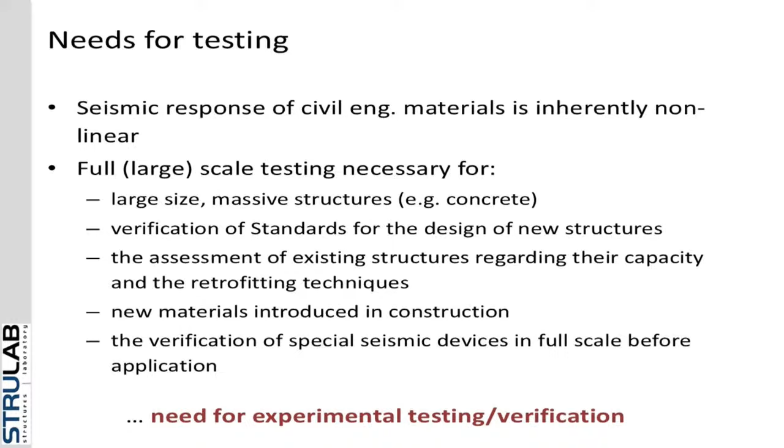So what do we need to test? We all know that the seismic response of civil engineering structures is highly and inherently nonlinear. So full-scale testing is necessary, because we have to deal with large, massive structures. We need to verify standards for the design of new structures, assess existing structures, and study how to increase capacity through retrofitting techniques. We introduce new materials in construction and have to test them before being applied in practice. And we need to verify seismic devices in full scale before application. So the need for experimental testing exists, and it's very intense.

And what tools do we have at hand? In experimental methods, we can go from slow static testing to dynamic testing, depending on the rate at which we test the structure. In between lies the hybrid simulation. If we count the response realism of each method, cyclic testing at low cost can have little realism with an actual seismic event, the response of a structure in a seismic event. On the other hand, shaking table testing is the real thing, but even done at scale, this comes at high cost.

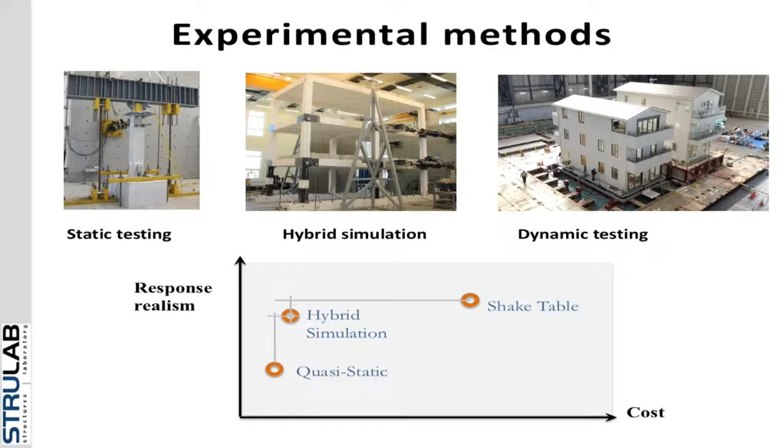The hybrid simulation strives to lie between these, trying to have a good enough prediction of the response of the structure, but at a reasonable cost. And of course, hybrid means that we merge two things. What do we strive to merge? We strive to merge our numerical capabilities for things we know, to experimental testing for the parts of the structure that we don't know really well.

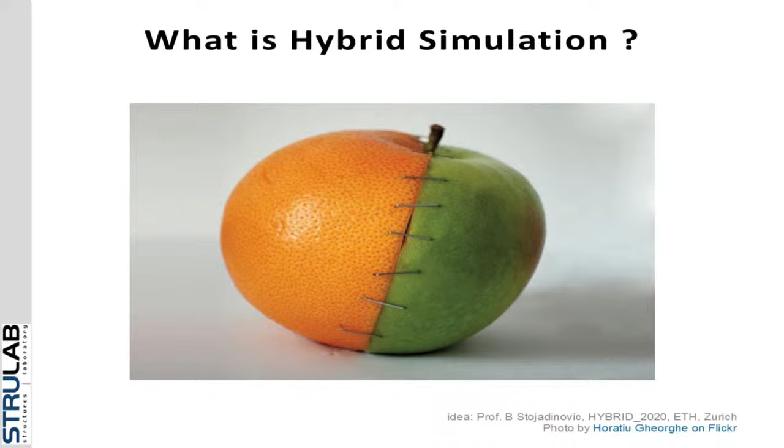So the main idea is that we split the inertia and damping forces, which are accommodated by a numerical model for the part of the structure, or the whole structure, that we really know the response and can describe pretty accurately. Then regarding the seismic resistance of specific parts of the structure, we rely on physical modeling. We can construct a specimen in the lab as in the picture, run a code and solve the equations of motion, get the displacement for each step of the accelerogram, feed that displacement to the actuators on the structure, measure the force that the actuators need to apply these displacements, and then feed back this force, which is actually the product of the stiffness times the displacement.

But it's the real thing. We don't make any assumption on that. And this becomes the initial point for starting the solution for the next time step. So it's a step-by-step procedure.

Just a brief historical note: initially this technique was termed online computer-controlled test or pseudo-dynamic test. The word pseudo is not very accurate, it might be misleading sometimes—it's not the real thing. Everything happened at the University of Tokyo initially in 1969, so it's already quite some decades ago.

And they ran several tests until 1975. Actually, in 1975, they conducted the first substructural test. I will go through this in a while.

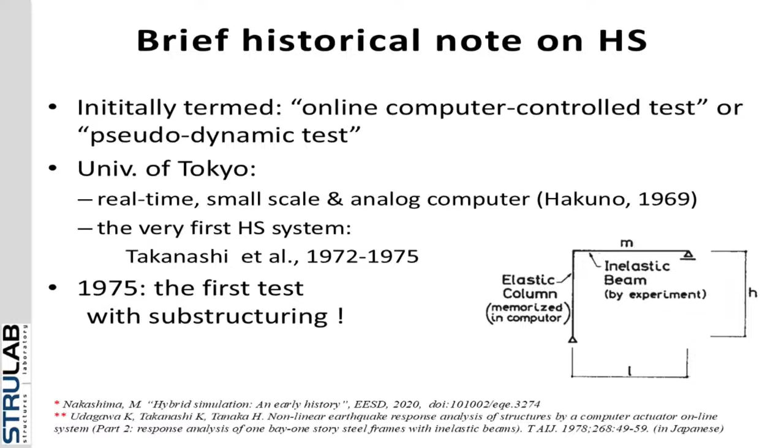Then the hybrid simulation, also the pseudo-dynamic technique, its evolution can be distinguished in decades. So between the 70s and 80s, there were many tests at the University of Tokyo, both on concrete frames and steel structures. Then the US-Japan Joint Research Project gave a large impetus to this technique, so it started being applied also in the United States at several facilities.

Like the one at San Diego, between the 80s and the 90s. And from the 1990s until today, the method initially saw a great development thanks to the NSF project, which was a 10-year project of $80 million that really paved the way and created many tools that we use even today. And it was then that the term hybrid simulation was coined for this technique.

Just to note that since 2000 till today, there are more than 200 papers, and maybe I haven't counted them pretty well, on employing this technique. To implement this technique, we need certain ingredients.

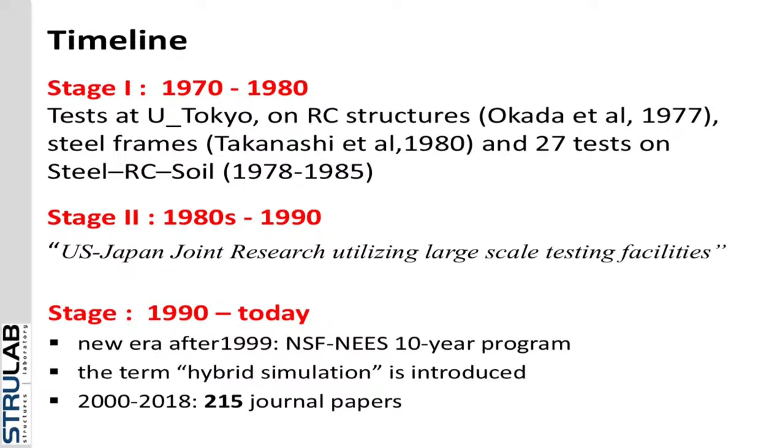We need hardware, but not something special, normal hardware with some characteristics. We also need special software, though, because we are coupling two entities, the numerical part and the experimental part. And there are several platforms available, open source platforms available for this scope.

Normal control schemes can be applied for the dynamic testing technique, but also newer ones can be employed in certain cases, like mixed control, force and displacement, or switched control—switching during the test from force to displacement if you go over the peak of the force. You need communication among the components, because your controller in the lab has to communicate with some numerical solver.

And for all this, of course, we need quality and reliability. And the reliability depends on the errors that appear, both on the numerical part and the experimental part. I won't go through the details—it's not the place, it's not the time to do so. But I want to stress that there are experimental errors, and the problem is that if we don't take care of these errors, they accumulate because this technique is stepwise.

So we run through 2,000 points of an accelerogram, and if you have even a tiny error in the force or the displacement which you apply to the structure, this accumulates, because the new values that we measure bear this error too, the influence of this error too, and it accumulates through the test.

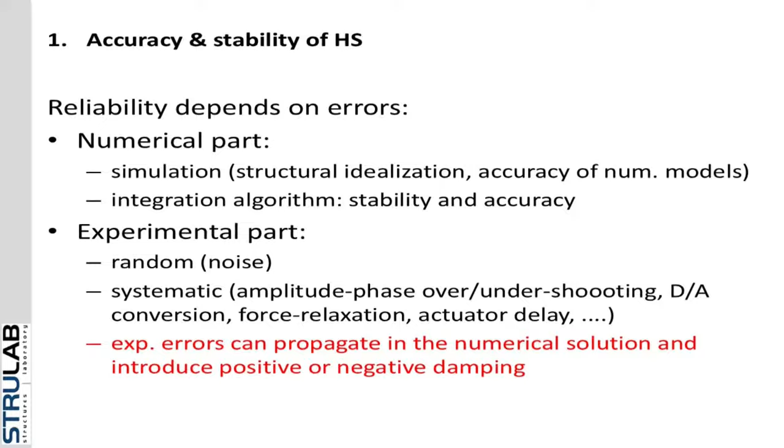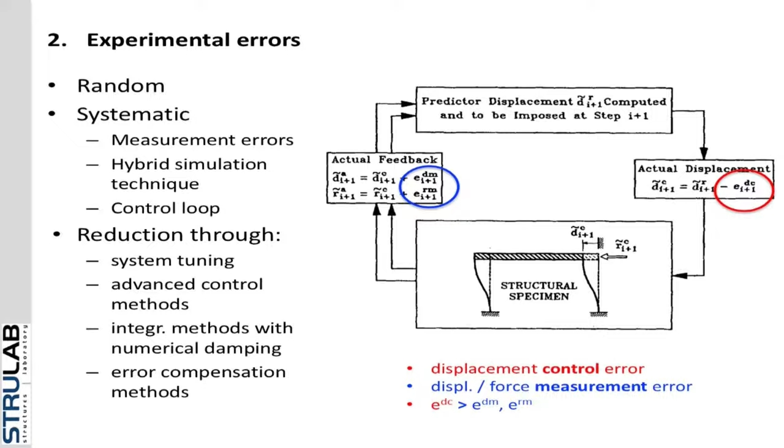So I will skip this. There are several error tracking indicators. They have been developed both for the local response and the global response. And principally, what we might want to look at during the test online, a good indicator is the energy indicator, input and consumed energy during the test. This is a good indication of whether the control is good and the test goes well, because there is no other way to understand if the structure deviates due to experimental errors during the response.

And the hybrid simulation technique comes in several forms, so there is a lot of flexibility depending on the problem we want to study, and this is very important. You can run a normal pseudodynamic test very slowly, taking 3 or 4 hours, but you can also run a real-time hybrid simulation test, which runs in approximately the same time scale as an actual earthquake, like a shaking table test. But we don't have a shaking table—the structure is fixed at the floor of the laboratory.

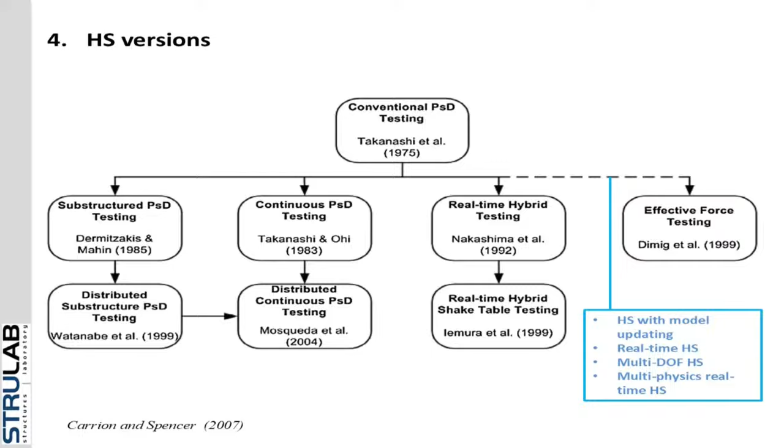So this is all I want to say about the method at this point, and I would like now more to stress the applications. So we will go through some full-scale tests that have been run with the hybrid simulation technique—some hybrid simulation tests, including with substructuring, continuous hybrid simulation with substructuring, tests on non-structural components, soil-structure interaction, and distributed hybrid simulation.

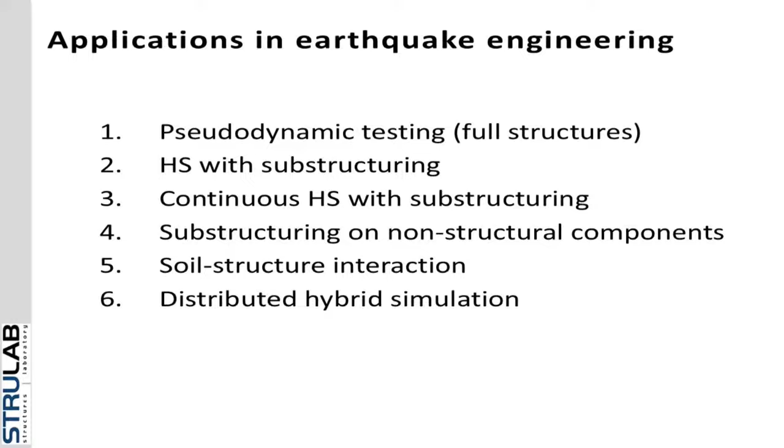So one of the first tests we conducted in our laboratory was a two-story structure, and this structure contained all the structural deficiencies of existing structures: small dimensions, lack of stirrups, deficient lap splicing. Moreover, one side of the structure had a higher stiffness, double the stiffness, than the other side. The columns on one side were 25 centimeters, on the other side they were half a meter.

This was provoking, obviously, a torsional response of the structure. How does such a deficient structure respond to this structural characteristic? So this was important to run. And this test was in full scale. There's no substructuring. A numerical model was producing the displacements and the rotations that we needed to apply at each floor, and with 2 actuators per floor, we could apply displacement and rotation as prescribed by the numerical simulation.

And this technique was applied in 2 configurations of the structure, one a regular one and one with an open story. So the upper story, you see in the picture here, the upper story is infilled.

Of course, we don't do the test just to identify the deficiencies, we have to correct them. And then we can employ several techniques. In this structure, we employed a series of different techniques. In the first case, we attempted to reinstate the stiffness balance, so we jacketed the columns on one side, giving the same stiffness on the two sides to take off the influence of the torsional response.

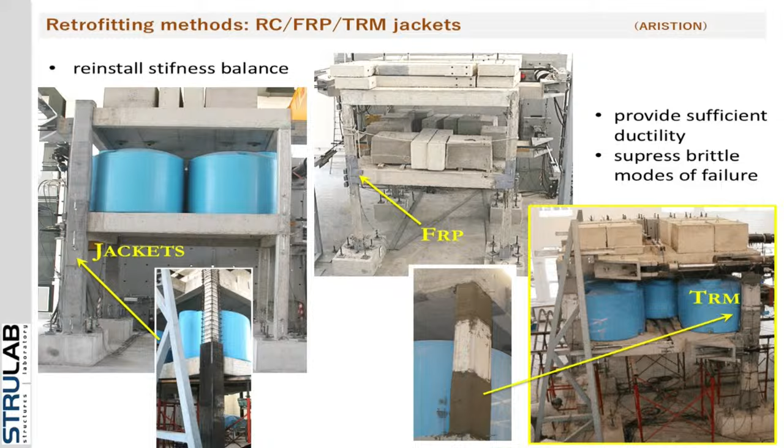Another test that we performed in full scale regards a steel structure, and this is actually a collaboration with a team led by Professor Di Sarno in Project ERIES. In this case, again, there is a difference in the stiffness at the base of the columns on one side with respect to the columns on the other side, and this provokes, obviously, the torsional response.

But on top of that, we needed to apply 2 seismic motions in 2 transverse directions, and this has been done in the lab.

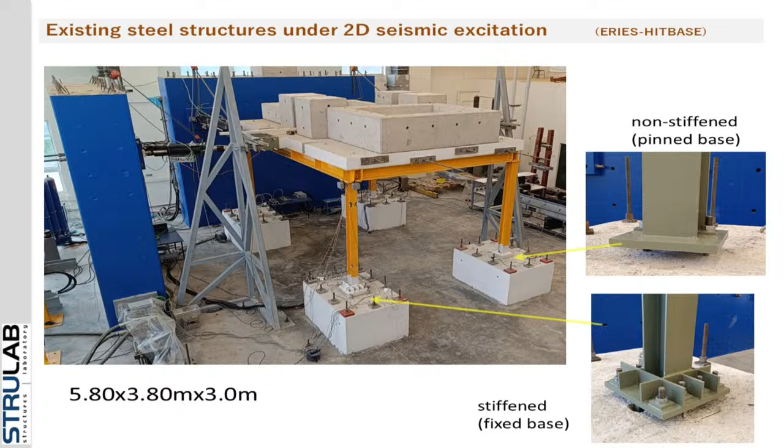Another thing that we wanted to observe was the effect of having successive seismic motions on such a structure, so if we have a repetition of seismic input one after the other.

This also requires some adjustments in the testing strategy, because the numerical solution provides you the displacements at the center of stiffness of the structure in the global coordinate system, but when you command the actuator to apply a displacement or measure a force, this is done along the axis of the actuator, which does not coincide with the center of the global reference system. So we need geometric transformations between the commands sent to the actuators, and from the measurements we take from the actuators to feed back to the numerical simulation.

I have a short video on that in which you can see the response of the structure, and this is a graphic of the response to the two seismic motions applied in transverse directions, and what the two different types of base connections do during the test.

Excuse me. What have I done? Okay.

On the upper left, you can notice the movement and the torsional response of the structure, the biaxial response, and also what is happening at the two types of bases of the structure.

This is a distinct advantage of hybrid simulation, because it runs slowly. You can stop the test, you can restart the test. You cannot do that in a shaking table. You can observe things in between, you can mark the cracks, you can have information at any stage you want.

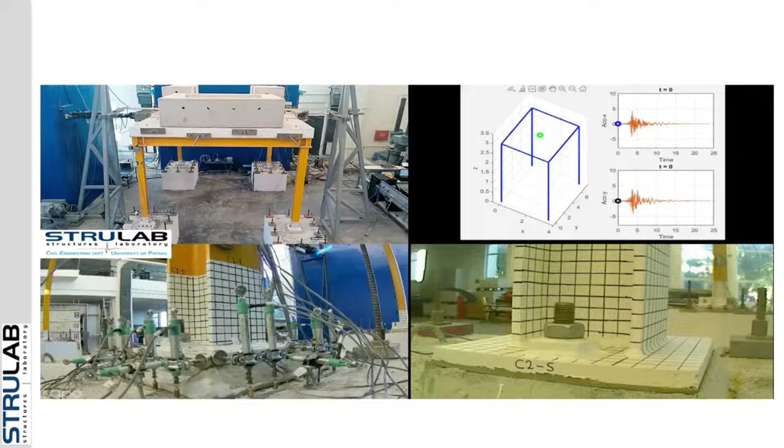But then, according to my opinion, the strongest characteristic of a hybrid simulation is the possibility of performing substructuring. Substructuring means that in the lab we bring only the part of the structure that we want to study, and the rest of the structure is another substructure which we can model adequately well, and it's run in a numerical simulation. So in the lab, you don't need to construct a whole bridge.

You just place the isolator in the lab, and the deck and the rest is in the numerical simulation, in a simulator. So in this case, for example, if we consider the technique of bay infilling, that is the technique where we increase the stiffness in certain bays of the structure so that displacements decrease for the other members of the structure. This is a technique often used because we only employ interventions on the external skirt of the structure. We don't create problems for the inhabitants of the buildings except at some special points, and then we just infill with concrete the bays of the structure along its height, and obviously we have to reinforce the foundation too because the moments are increasing.

So for the whole structure in the lab, one can find only the 4-story shear wall that becomes after infilling of the bays, and it's laid horizontally because the height of the lab does not permit to have 12 meters of height of specimen, 9 meters in this case, in the lab. So this is horizontally placed with supports below and swivels that can take up the own load, the self-weight of the wall.

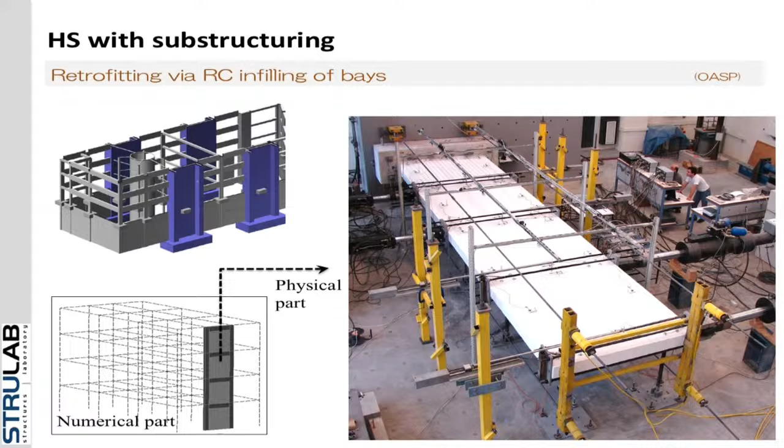In this case, the topic of the study was how to obtain a monolithicity between the initial frame and the reinforced concrete that we placed inside the infills, and what measures, how many dowels, and how close to each other should we place them to guarantee such a monolithicity.

And the second issue that we studied, this was an experimental one, is that for stiff structures there are certain difficulties to apply the hybrid simulation, because being very stiff produces very tiny displacements, and these displacements may create control errors, where we are talking about displacements of the order of microns.

Imagine you have a block and you have two actuators. The actuators never stand still. Even the slightest movement, 1 or 2 microns of one actuator, because the structure is stiff and the actuators are anchored on this block, is being felt by the other actuator, which needs to compensate and place the specimen in zero position again. So the actuators start fighting between each other, and within seconds you find some hundreds of kilonewtons being applied to a structure at very small displacements.

So this tight cross-coupling can be faced with different techniques, but may lead to instability if we don't take care of that. Also, in such a case of a very large structure, we try to take advantage as much as possible of that. So we had this idea that we employ a very heavy reinforcing technique on 2 of the sides of each bay.

So we follow the prescriptions of the codes for how many dowels we need to place to take up the shear, and how many other dowels we place to connect them with the reinforcement that we will place within this bay each time.

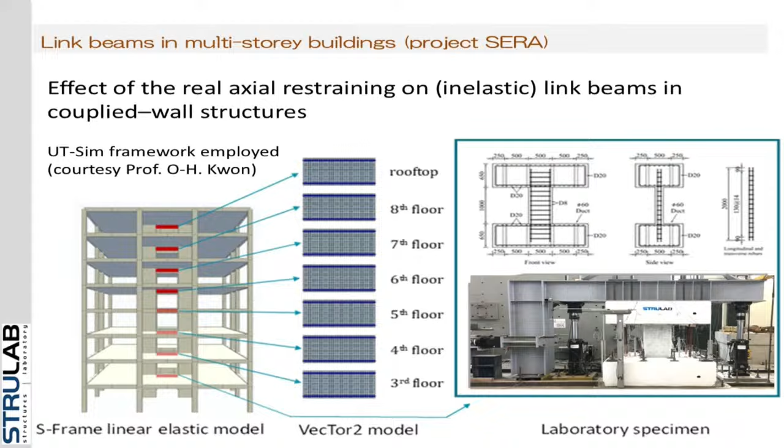But it's not only for buildings, this technique. We can study industrial buildings in the sense that there is other equipment like piping that crosses structures, and maybe when these 2 structures with different characteristics are excited seismically, then we need to know what is the displacement history that we need to apply to such a piping system to check its integrity.

And in this case, because this displacement history is unknown, the only way to do that is to have a numerical simulation of the 2 buildings and then apply the resulting displacements to the piping system in the lab. This is a 14-meter long piping system, and we can employ advanced techniques to watch closely the most vulnerable parts, like the elbows of this piping system.

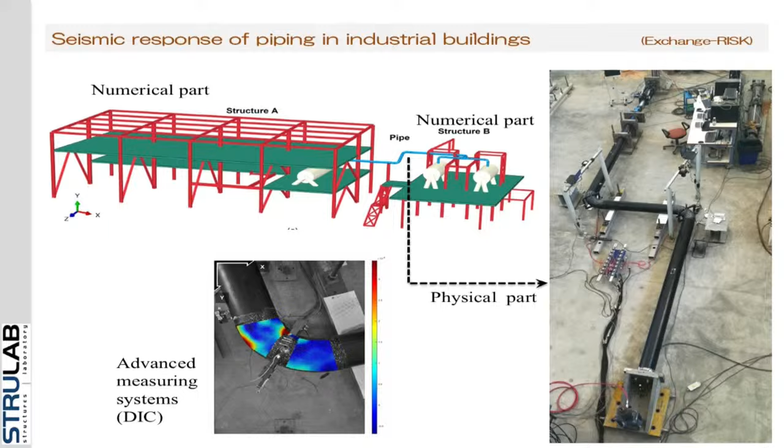Regarding substructuring, there's another example, this multi-span bridge with simply supported beams, in which we wanted to see the behavior of the elastomeric bearings. Elastomeric bearings are not very rate sensitive, in the sense that the velocity of movement doesn't affect their properties much, but still this is something we have to take care of.

In this case, we employed a correction technique in which we corrected the force coming out of the actuator, to compensate for the test being run slowly instead of at the rate of an earthquake signal. Here's an example of how we split the matrices between the numerical part, the physical part, and the degrees of freedom in between. This is a way to increase testing speed before arriving at real-time testing.

Another very attractive but difficult characteristic of substructuring is that you don't need to have the numerical and experimental parts in the same place, in the same lab. You can have the numerical part anywhere in the world, and receive in the lab the command displacements from a numerical solution. This is important in cases where someone has built a model somewhere in the world that we cannot ask for the code for. What we can do is give them the opportunity to send us results from their code, and we apply the forces in the lab. So there is a synergy there that really enhances the potential of hybrid simulation.

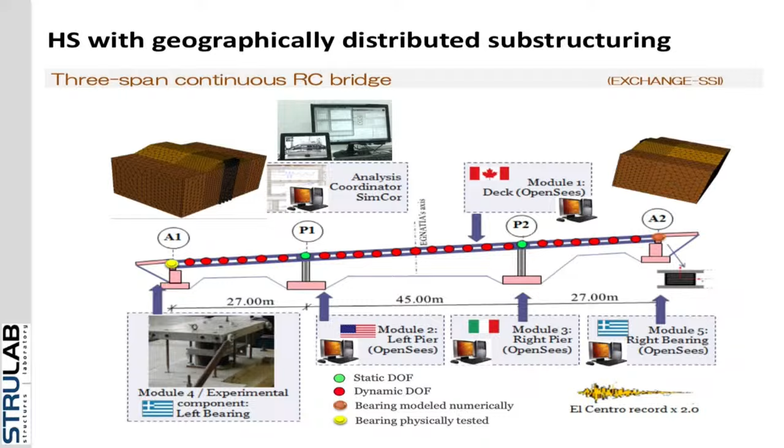The hybrid simulation can also deal with soil structure interaction problems. For example, in this case we have a two-span bridge, and we need to take into account what is happening at the base of this foundation. You can place this foundation in a soil pit, but we didn't have one. So in this case we used a numerical model to represent the soil stiffness and behavior, and had the physical part in the lab.

Because the connection between the mid-pier and the deck is monolithic, we needed to apply moments, so we had a couple of actuators applying displacements and moments at the top of the pier. Again, the case of stiff coupling between the actuators is present, because the actuators are at very close distance, so one influences the other, and between them there is a very stiff stub at the top of the pier.

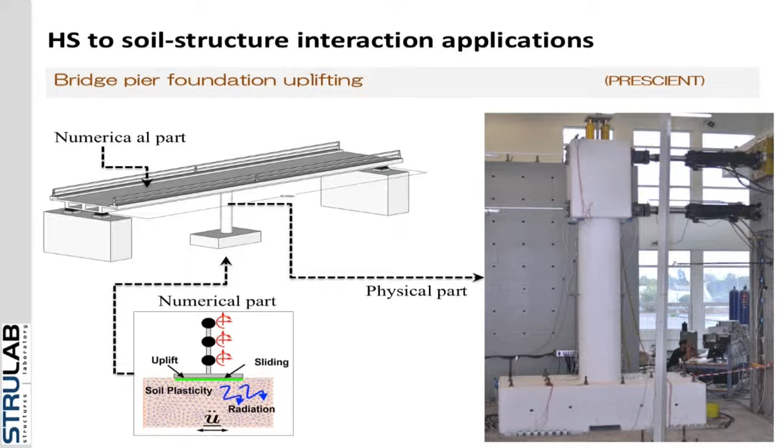Finally, along the lines of distributed hybrid simulation testing, I would like to present a preview of a test we are planning for the next months. This regards a timber structure, which includes some shear walls, also from timber. The idea of the test is the following.

We will numerically represent the whole rest of the structure, except the lower part of the wall, which is going to be placed at the soil pit at the University of Bristol. At this soil pit, the actuators will be applying the vertical force and the moment at that degree of freedom, at the top of the first floor. Then the rest of the structure will be numerically represented at the Hanze University in Groningen.

If after some time the sand becomes pulverized, you can open up a tap, let it flow, and then fill it in again. On top of that, you can apply some pre-compression on this sand, so you can increase this friction in a measurable way. You can also apply strain gauges externally and measure that force, etc.

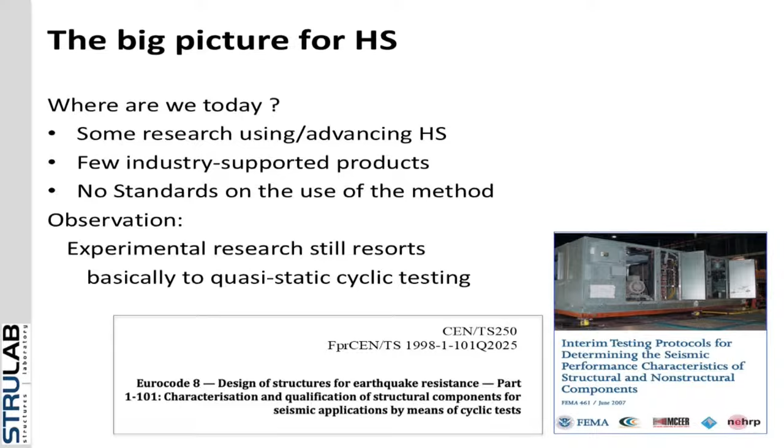So hybrid simulation is not just a tool, it's a way of solving problems. It modifies itself, it's very flexible, and can fit the problem we need to solve. But we have to do some things about it, it's not automatic, it's not just a method. At the same time, it has considerable potential for earthquake engineering, but also for other disciplines.

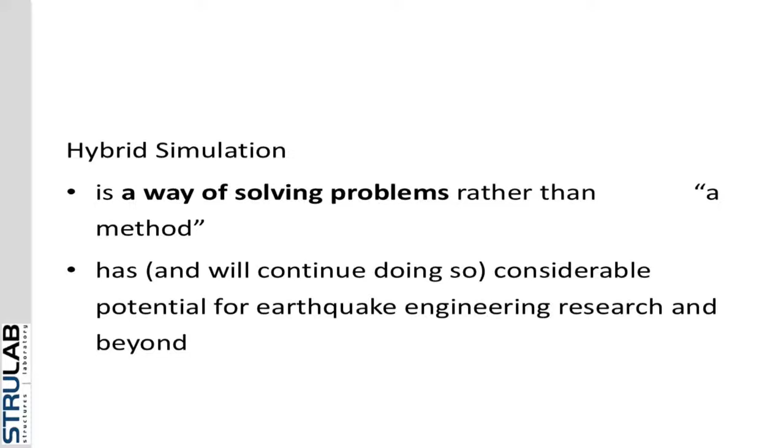Thank you, Stathis. I don't know if there is any short question on the very interesting overview and presentation done by Stathis. Stathis, the ReLUIS was born when in the United States they were creating NEES.

We always say this, we know that NEES has been created just to create a network of labs. We also know from American colleagues that the sustainability of such labs is not easy over time, as you said. And so, since many years, the Department of Civil Protection is not funding anymore the equipment to units.

We are trying to really take advantage of the equipment present in different laboratories. And I agree with you, this is the future, because in order to perform very good testing, we need equipment, and we need people with advanced competencies. So it's not easy to just buy an actuator or shake table or a reaction frame, and then you have a good lab. So this is the philosophy we are adopting.

And I think Giampiero Lignola will present later a work package that we are carrying out as ReLUIS in the last years. There is Felice Ponzo from University of Basilicata, Alberto Pavese, I think he was here yesterday from Pavia, and also University of Trento. The four funding labs try to guide the process in order to put online and together the data, as you said. Giampiero will tell you that it's not an easy task, because each lab has its own system of data storage and management.

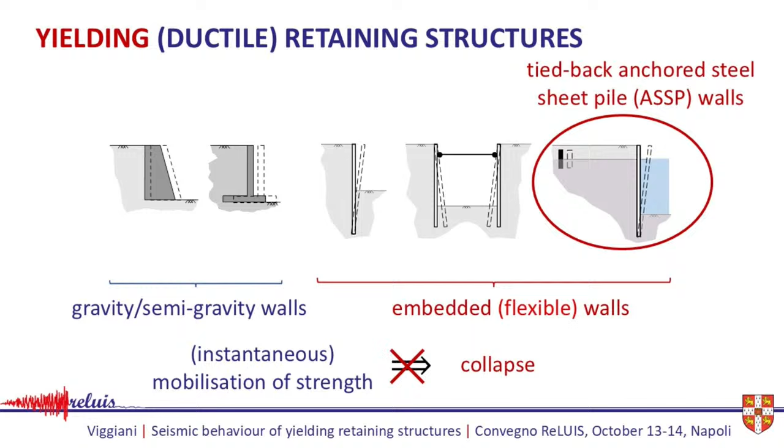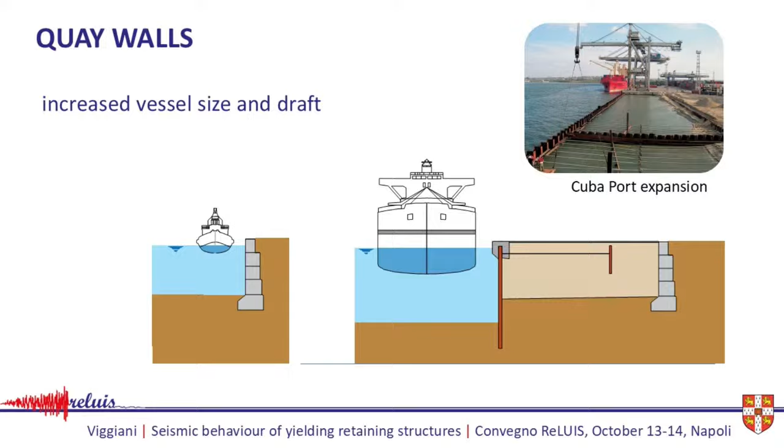Also, an overlap between the shipping routes density and the seismic areas of the world indicates that if we want to use this type of structure for seafront structures, the question of their seismic design is absolutely vital. So we cannot ignore the seismic design of these structures.

It must be said, it is fair to say, that there are many reported cases of damage to seafront structures that are very often associated with excessive displacements and sometimes failures. But very often these failures are not brittle failures, they are rather excessive displacements that have compromised the serviceability of the port infrastructure.

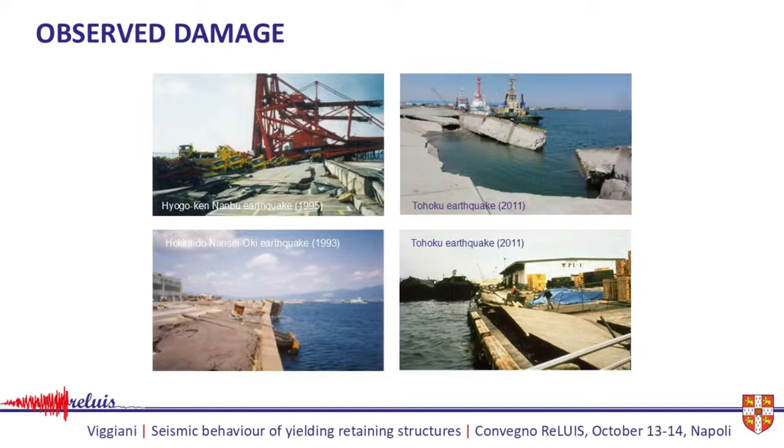Now, what sort of tools do we have to design this type of structure? In the conventional seismic design, the simplest approach is the pseudostatic approach. In this case, what we assume is that the soil around the structure is in limit conditions, either active or passive states, and we represent the seismic actions using pseudostatic equivalent forces that are proportional to the masses through some seismic coefficient, horizontal and vertical, which is constant in time and space.

So we reduce the effect of the earthquake to a system of static forces. And very often the pseudostatic, the equivalent seismic coefficient is proportional to the peak ground acceleration, to the maximum acceleration expected at the site. Of course, this is the most basic approach.

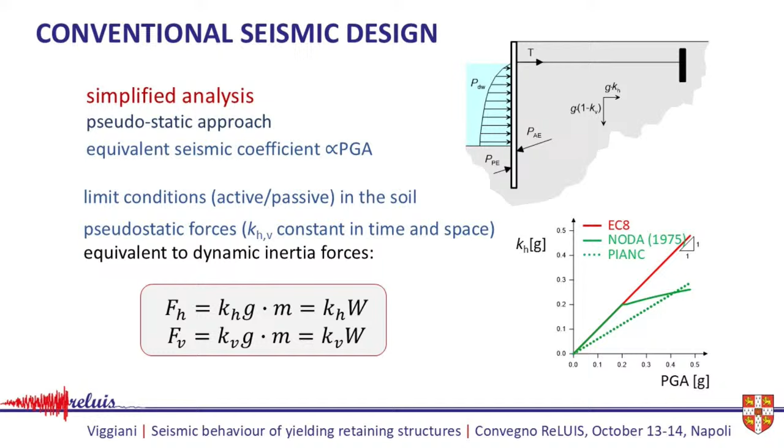As an alternative, we might think, okay, let's carry out some advanced numerical analysis, which could be done with finite element or finite differences, typically carried out in the time domain, so fully coupled analysis, with advanced constitutive models to represent the nonlinear and hysteretic behavior of the soil.

However, these analyses are very complex. Of course, they can be used to directly check whether displacements, rotations, and movement of the structure are acceptable under the design earthquake, but they can be very, very demanding from the computational point of view. And it's not just a matter of computational point of view, it's a matter of general expertise of the person that needs to carry out the analysis, parameter identification, boundary conditions, and so on.

So are these two approaches feasible for the type of structure I want to talk about, that is anchored steel sheet piles?

To answer this question, I have plotted in this graph typical steel sheet pile solutions on the y-axis versus peak ground acceleration. I have identified some areas from the most economic typical Z sections to the much more expensive and non-economic combined systems, where you combine several steel profiles together to have a very resisting wall.

Now, if we use the pseudostatic approach, the actions increase very rapidly with the peak ground acceleration, so much so that for accelerations between 0.2 to 0.3 g, you cannot find a viable design solution. So at one point you have to say, no, I cannot build this wall with a steel sheet pile.

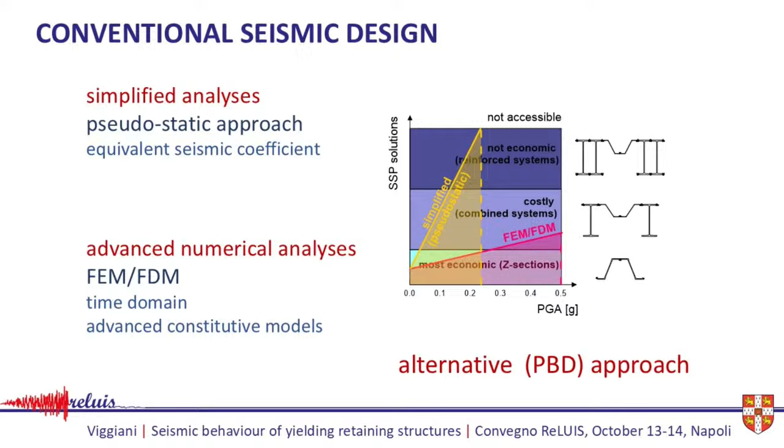For instance, if you are considering a serviceability limit state, you want to limit the deformations of your system under frequent and therefore weaker earthquakes. And so the sort of things you want to look at in your system are, of course, the strength, but also the stiffness of the structural elements, which will play a significant role.

If you're looking at the ultimate limit state, you want to avoid the brittle failure of your structure, and this is, of course, under a rarer but significantly stronger earthquake. So the components and properties of your system you want to look at are the strength, of course, but also the ductility: how much can the system accommodate large displacements without failing?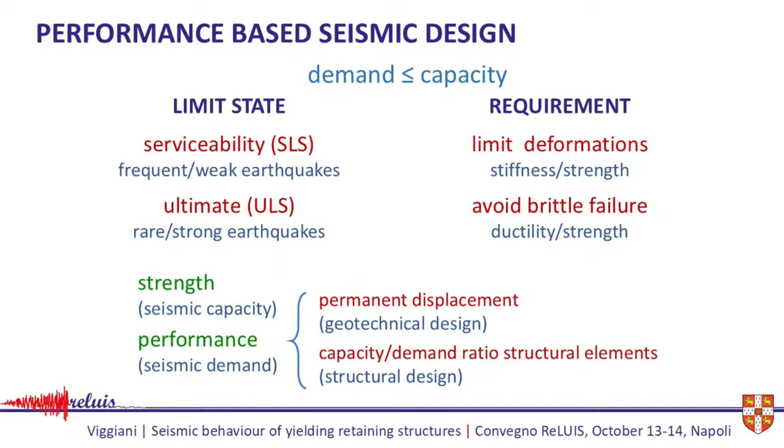So if we go for a displacement-based approach, we might think of computing the displacements of the structure and comparing them directly with some admissible value of displacement.

So it is clear that displacements are very, very important. Now, when we look at the performance-based design of gravity or semi-gravity retaining walls, the type of approach used more often to look at displacements is the Newmark's method.

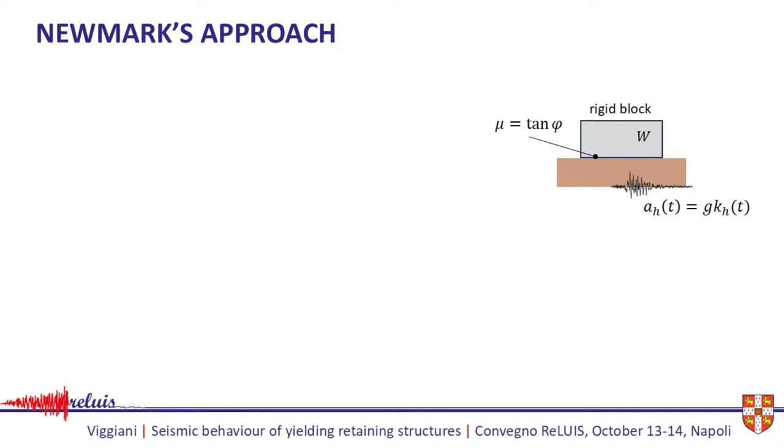In Newmark's method, the system that Newmark analyzed is a rigid block with weight W, resting on some frictional base, and then the base is accelerated using some time history. Now, if the acceleration is less than the critical acceleration of the system - which in this case is the acceleration required to fully mobilize the frictional strength at the base of the block...

...of course there are no relative displacements between the block and the base. The absolute acceleration of the block is equal to the acceleration of the base, and the internal force, that is the force at the contact between the block and the base, is directly proportional to the acceleration.

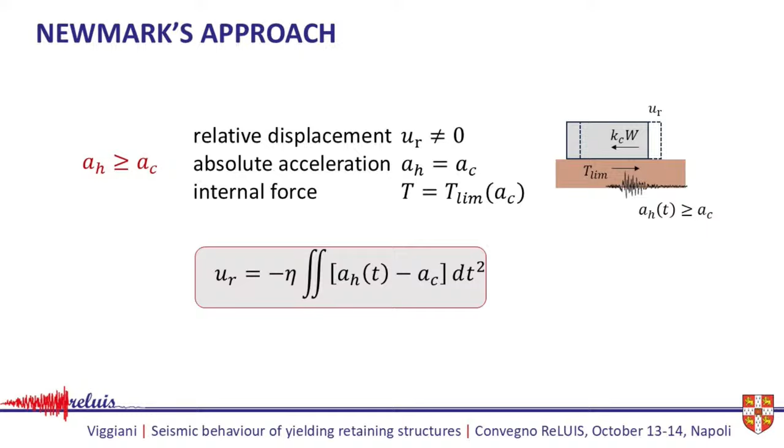On the other hand, if the acceleration is larger than the critical acceleration, you have non-zero relative displacements, the block will slide relative to the base, but the absolute acceleration of the block would be limited to the critical acceleration, and internal force would be limited to the strength of the system. So they are both constant and equal to the value they have when the base acceleration equals the critical acceleration. During the sliding, you can work out the relative displacements, the permanent displacements of the block and the base, by double integration of the relative acceleration over the time intervals in which the relative velocity is non-zero. So this is more or less what we do to work it out, with some little changes.

There is this eta factor that is essentially something very close to 1, but it takes into account the geometry. A retaining wall, a gravity retaining wall, is not exactly a block resting on a horizontal plane.

So yes, we can try, but we have some fundamental questions. The first one: how do we compute the critical acceleration? To what failure mechanism would this critical acceleration correspond? For the block, it's super easy, the block doesn't have anything else to do than slide backwards and forward. For a wall, this might involve some complex kinematics, some deformability of the system. We will have to think about it.

What about the maximum internal forces? By internal forces, I mean the anchor force and the maximum bending moment in the wall. Are they really bounded by their critical values, like the limiting strength at the base of the block? And third, how can we compute the permanent displacements of this block? Is the rigid block assumption something we can use? So with these three questions in mind, we can look at what we can do for these systems.

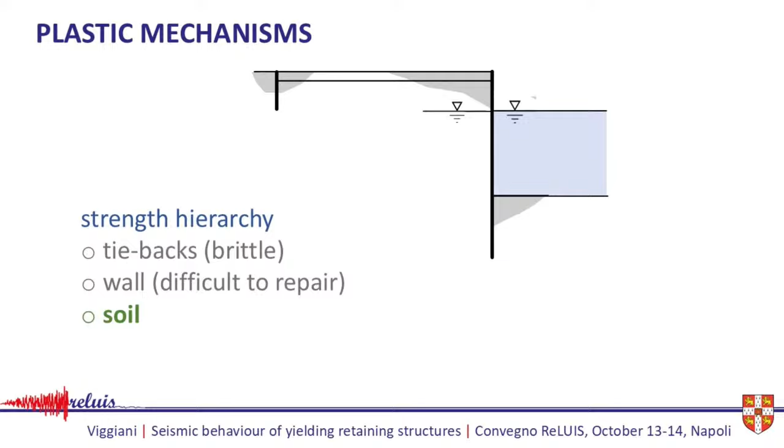Also, for the sake of this lecture, because we don't have a lot of time, I will just consider a dry system, so I will throw out of the window all complications that have to do with water, both in the backfill and in front of the wall. Now, what sort of mechanisms can we think of?

Of course, the wall might fail by toe failure, that is, the passive strength in front of the toe of the wall is reached, and the bottom of the wall moves outwards. Or the wall might fail by anchor failure: the passive strength of the soil in front of the anchor is reached, and the anchor fails. Again, the wall rotates outwards, but around a point towards its base. Both these mechanisms we call local failures, because they correspond to local failures of the soil in critical parts around the structure.

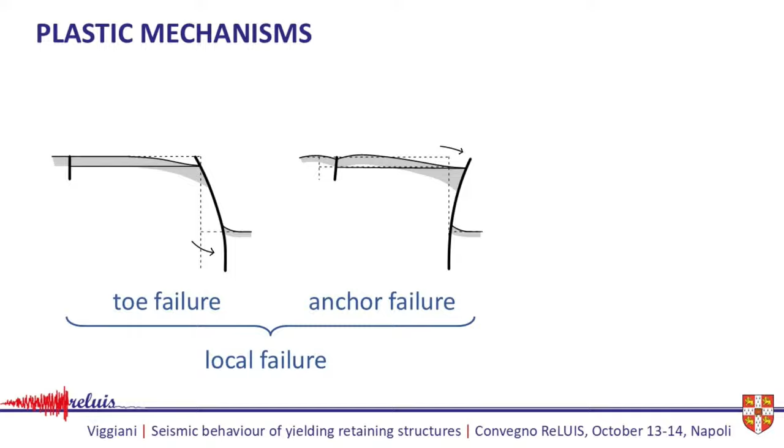Or you might imagine that this wall fails with a global failure, so there is an entire wedge of soil contained between the surface, the main wall, the anchor wall, and some sliding surface that moves as the soil is failing. Now the question is, which of these three mechanisms is going to be critical? Over the years we have developed a number of limit equilibrium pseudostatic solutions in which we assume an earth pressure distribution around the wall and can compute the critical acceleration corresponding to toe failure, anchor failure, and global failure. We can define the critical mechanism as the one for which the critical coefficient is the smallest.

So the critical mechanism is the one that has the minimum value of the critical seismic coefficient. And of course, with these same methods, you can also work out what the internal forces are, what the anchor force and the bending moment in the wall are at failure. So we have an operating definition of the critical acceleration for these systems.

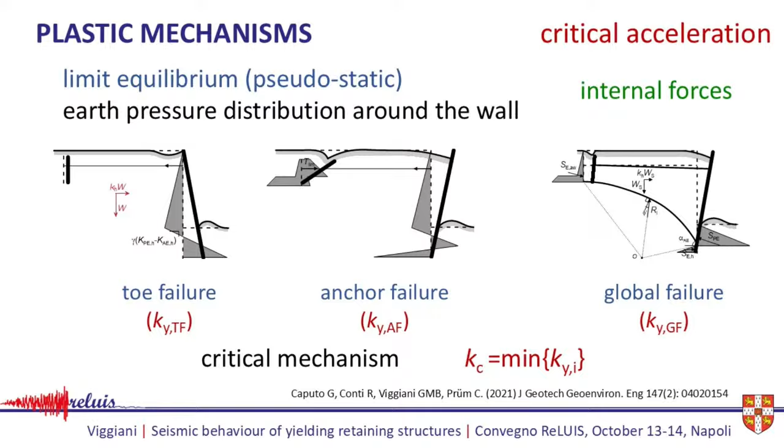Now, these theoretical solutions, so limit equilibrium solutions, were also verified by numerical analysis. In this case, we used plane strain numerical analysis using the finite difference code FLAC, and the soil was modeled as elastic perfectly plastic with Mohr-Coulomb yield criterion and non-associated flow with zero dilatancy, and the non-linear hysteretic behavior of the soil within the yield surface was reproduced by a sigma 3 model available in the library of FLAC, with Masing rules to simulate cycling, loading and unloading cycles.

All the structural elements, such as beams and cables, were linear elastic, and there were elastoplastic interfaces at the contact between the soil and the structure.

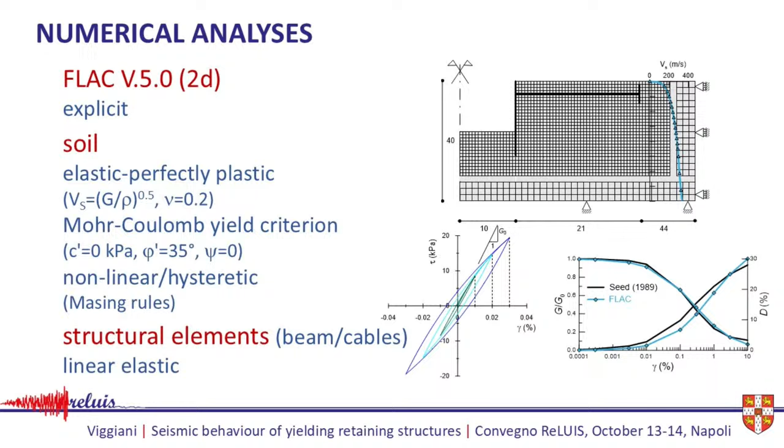With these numerical models, we ran two types of analysis: pseudostatic pushover analysis, in which the horizontal acceleration was increased until we couldn't find anymore a numerical solution, and full dynamic analysis, which were carried out with periodic boundaries and real acceleration time histories imposed at the base of the model. With this analysis, both pseudostatic and full dynamic, we examined a variety of different layouts, changing the length of the tendon, the position in which it was anchored, and the depth of embedment, and so on.

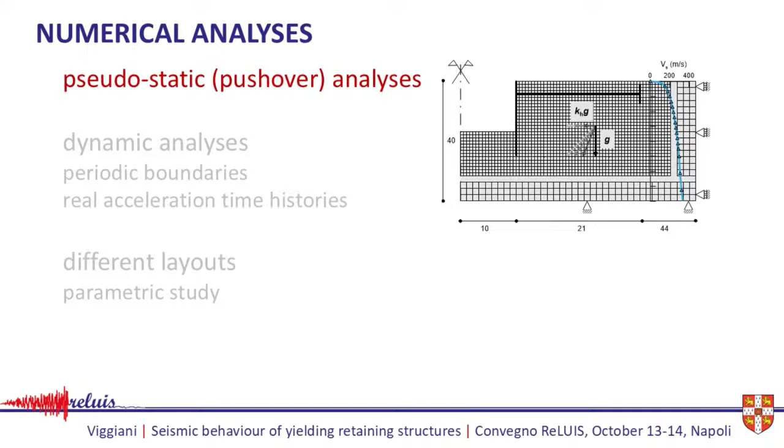Now, of all this analysis, I just want to look at two, case A and case B. One of them corresponded to anchor failure, and another one corresponded to global failure, because the layout of the retaining structure will affect which mechanism is critical for the system. So we will concentrate on one of the walls in group A and one of the walls in group B. I'm simply using this one because the layout is exactly the same, but for the point at which the tendon is anchored on the main wall. So they're very, very similar cases.

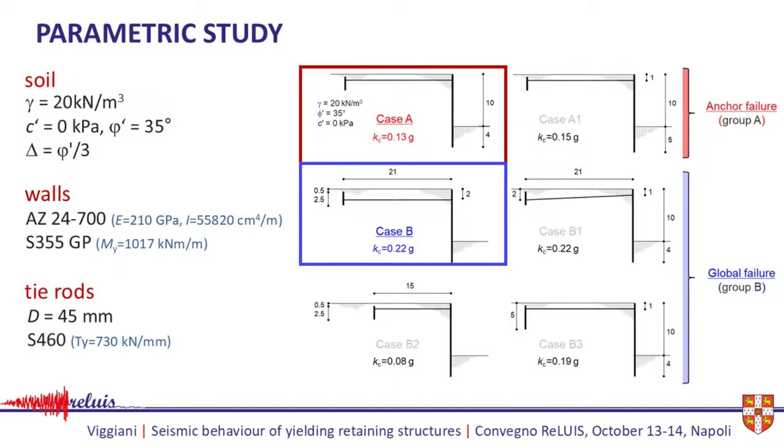And you can see this is the results from the numerical analysis. So this is the pushover analysis, where immediately before you cannot find convergence anymore, and so you can define the numerical critical coefficient and the critical coefficient found by limit equilibrium. You can see that both for anchor failure and for global failure, there is a very, very good agreement between the numerical values of the critical coefficient obtained by pushover analysis and the ones that we obtained by limit equilibrium, which is kind of reassuring.

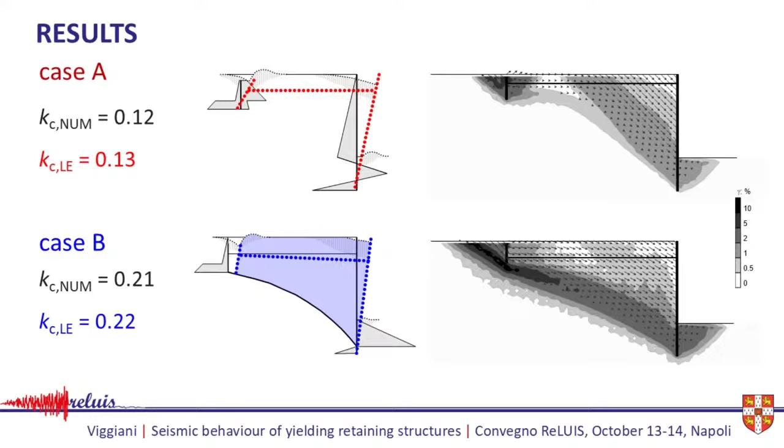This is true for a local failure of the anchor. Is this the case also for a global failure? So B was global failure. In this case, you can see that no, both the pseudostatic pushover analysis and the dynamic analysis are telling us that the internal forces can be higher than the value computed using the critical coefficient that corresponds to global failure. But if you then use the smallest of the two local failure coefficients, again, you are bounding the forces. So for global failure and the structural design, you have to use the smallest of the two critical coefficients corresponding to local failure, not the critical coefficient corresponding to global failure.

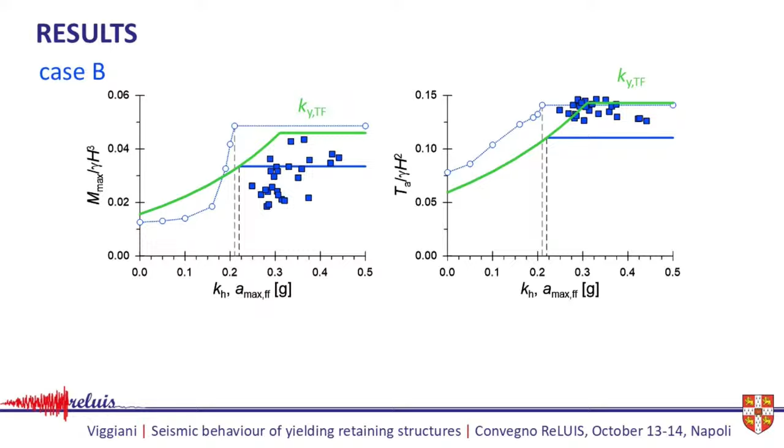Finally, some words on displacements. These are all the displacements computed from the full numerical analysis for local mechanisms in red and global mechanisms in blue. And they're plotted in a plot of the ratio A critical over A max as a function of the observed displacement, in a logarithmic scale.

You might notice that for A critical over A max greater than 1, which means the maximum acceleration is less than the critical acceleration, so the strength of the system is not yet fully mobilized, the displacements are non-zero. So there are displacements even before you reach full mobilization of the strength.

If you look at the ductility factor beta as a function of displacement, which is included in NTC 2018, this is not the case, because this ductility factor was derived using Newmark's block analysis and not a proper calculation of displacement. So you might use better ductility functions, and this is a proposal contained in an article I submitted with Riccardo Conti to Soil Dynamics and Earthquake Engineering.

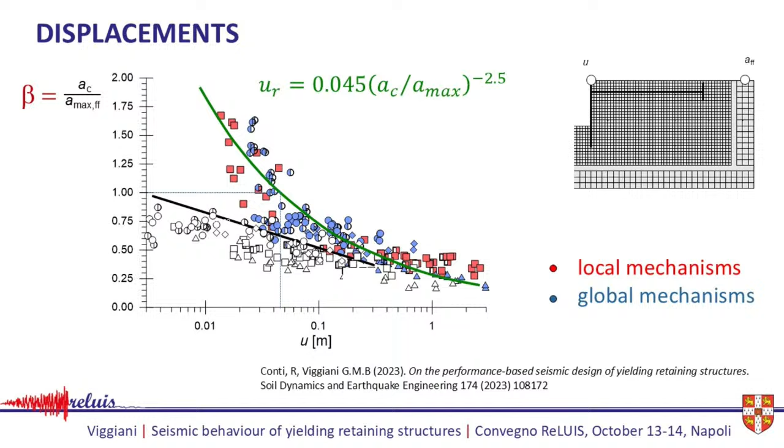But more importantly, you have to consider that this system is not a rigid block resting on a rigid base. In that case, the system is rigid, perfectly plastic, and there are no displacements before failure, whereas a wall will accumulate displacement. So there is a non-linear initial phase in which displacements are accumulated before the critical acceleration is reached, and then you get to the critical state.

Now, there are a lot of simplified dynamic methods that are quite simple to use: the nonlinear single degree of freedom method proposed by Callisto, the generalized Newmark method that I contributed to with other people, and the dynamic limit equilibrium method by Giorgio Caputo. Essentially, they all share this factor, that the nonlinearity before failure is accounted for by a pushover curve.

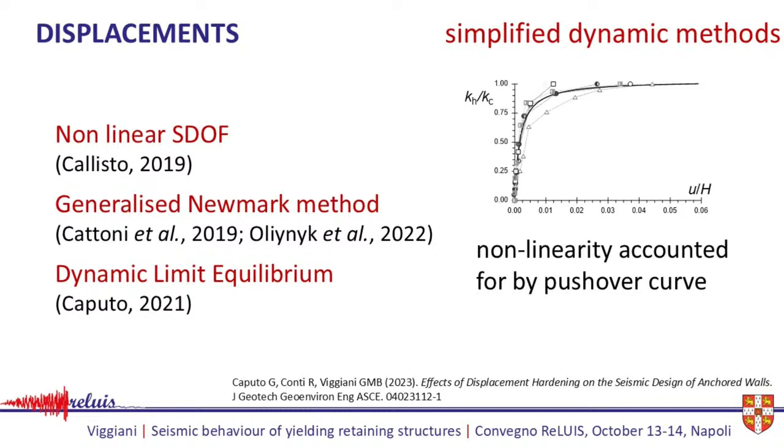I don't have time to go into the details, but I want to show you that if you compare the displacement from the single degree of freedom, generalized Newmark, or dynamic limit equilibrium methods with the numerical displacements, these are very close to one another. So we can predict displacements with very simple methods that do not require a complicated fully dynamic analysis. All you need is a pushover analysis, which is a static analysis.

And of course, the agreement is even better if you remain in displacements that are of the order of half a meter. That is reasonable.

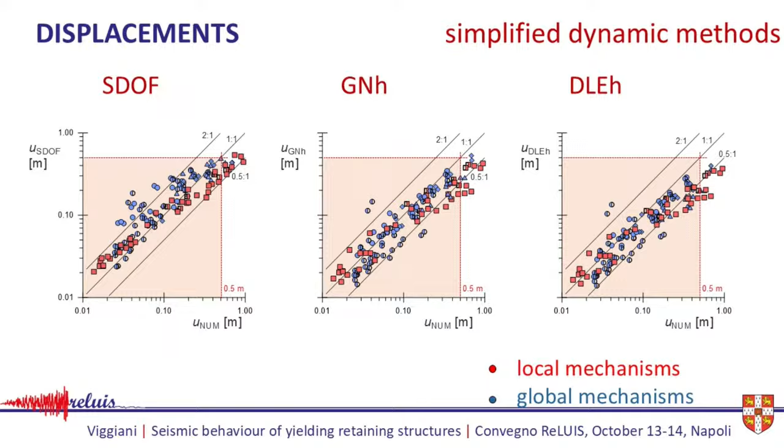To conclude, I hope I've convinced you that the critical acceleration is a crucial ingredient. This is the capacity of the system, the strength of the system, and it can be used both for structural design, to define the maximum internal forces, and for geotechnical design, the displacements. Pseudostatic limit equilibrium methods can be used to identify the failure mechanisms and the critical acceleration, and also to compute the maximum internal forces in the system.

The maximum internal forces are bound by critical values, not always those corresponding to the actual failure mechanism, but some other one. The activation of a ductile plastic mechanism is inherently safe because the structural elements are protected—they will not experience any bigger forces. For permanent displacements, the rigid block assumption is not applicable; there are other simple methods that can take into account the nonlinear behavior and the complex kinematics of this system.

And I'm done. I hope I haven't overrun too much.

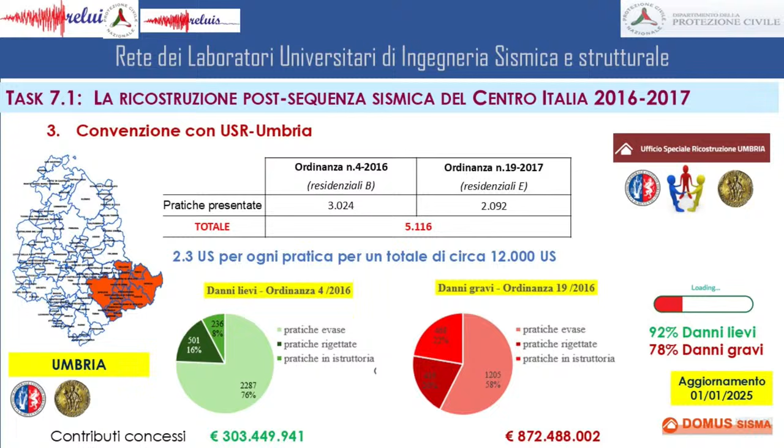E vedete che danni leggeri significano in Umbria circa 320 euro a metro quadro, danni più severi si arriva anche a una media di 1.600, con una variabilità che dipende dal grado di vincolo che l'edificio ha.

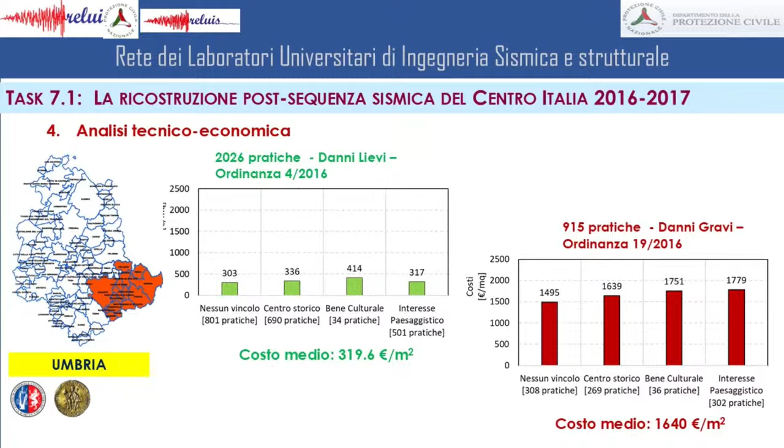Andando a desumere la vulnerabilità e il danno dalla scheda AeDES, quindi senza lo studio di dettaglio del professionista, con il livello operativo. Ma su questo, per affinare questo passaggio, stiamo lavorando anche nel task 7.4, perché la nostra idea è quella di cercare di avere immediatamente, attraverso dei dati più poveri come quelli della scheda AeDES, un'idea di quelli che possono essere i livelli operativi e quindi dei costi e dei tempi di ricostruzione.

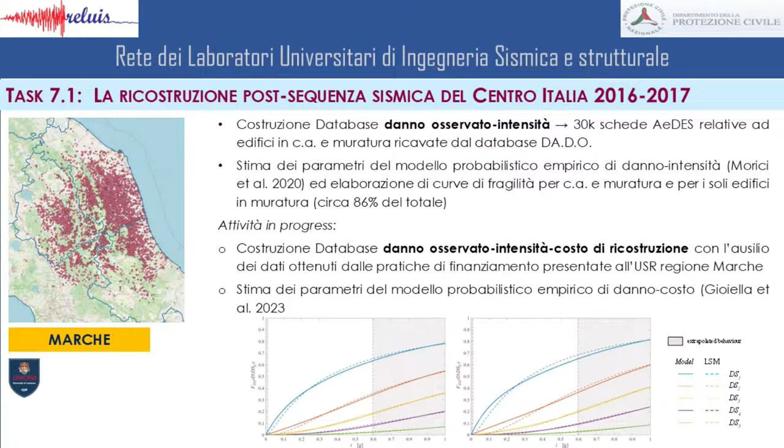Non solo l'Umbria, centro Italia significa anche Marche, con l'unità di Camerino prof. Dall'Asta stanno lavorando tanto sulla raccolta dati anche del terremoto del centro Italia, sulla valutazione dei danni, danno empirico, e anche sulla valutazione dei tempi e dei costi di intervento. Uno studio specifico lo stanno conducendo sul centro storico di Camerino, su cui stanno riuscendo a rilevare tutte le tipologie di intervento che sono state fatte anche nel post-sisma del '97, cercando così di comparare cosa è accaduto su edifici sui quali si è intervenuto nel post-sisma del '97 o sui quali invece in quell'evento sismico non si è intervenuto.

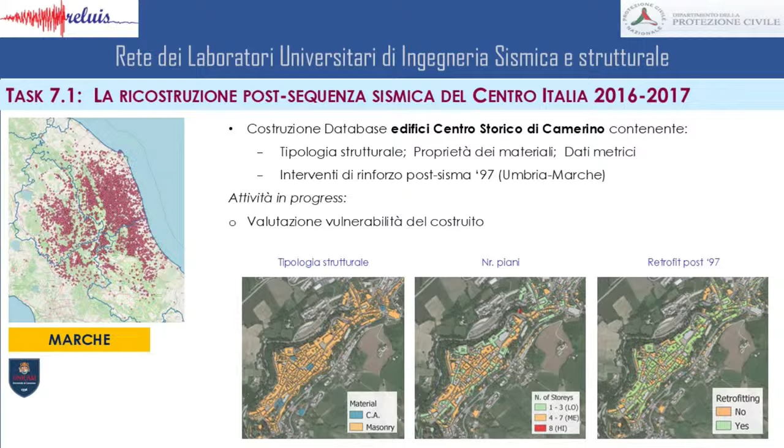Stesso tipo di discorso lo stiamo facendo in Abruzzo, dove stiamo guardando ai comuni che sono stati colpiti dai due eventi, quindi 2009 e 2016, ancora una volta cercando di capire l'influenza che gli interventi di un evento sismico hanno avuto sull'evento sismico successivo.

Non posso non citare rapidamente anche l'attività che stiamo svolgendo, che abbiamo svolto sui Campi Flegrei. Tante scosse tra il 2024 e il 2025, ci sono state più di 1.000 schede AeDES che hanno seguito i diversi eventi. Abbiamo analizzato ancora una volta i dati in termini di tipologia costruttiva e danno, con un dato significativo che ci sottolinea che eventi con magnitudo più bassa portano dei danni importanti in termini di danni D1 e D2, quindi danni leggeri, soprattutto sulle strutture in cemento armato, che vanno gestiti anche in un'ottica di costi.

Abbiamo dato un supporto nelle fasi decisionali per andare a valutare quali potessero essere i costi da associare ai danni avuti nei Campi Flegrei, e quindi quando ci è stato chiesto di dare un supporto in questo senso abbiamo poi definito i costi nella misura di 450 euro a metro quadro per edifici con danni leggeri e 1.200 per edifici con danni severi, che sono poi confluiti nell'articolo 4 del decreto che ha poi disciplinato il processo di finanziamento degli interventi nei Campi Flegrei.

E in fase di prevenzione, per il piano straordinario, abbiamo utilizzato i dati che abbiamo analizzato in questi anni per valutare quanto sia il costo necessario per incrementare di un punto il livello percentuale di sicurezza, attingendo sia ai dati delle ricostruzioni degli edifici residenziali sia dell'edilizia pubblica, e quindi abbiamo fornito una stima di quali possono essere i costi di intervento, di rafforzamento in funzione dell'incremento del livello di sicurezza, diviso e coniugato in termini di classi, come ormai siamo abituati dal sisma bonus. Questo per dare anche un po' il senso delle ricadute pratiche del lavoro che stiamo svolgendo in questo task.

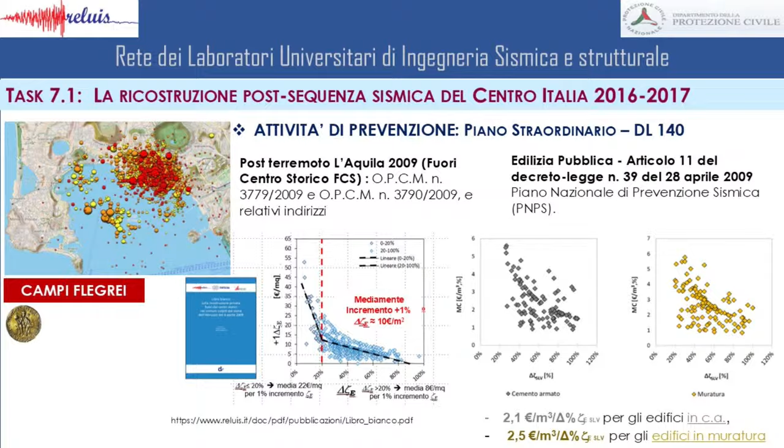Vado velocemente. Il task 7.2 mira ad allargare lo spettro d'azione, quindi a guardare non solo alle politiche di ricostruzione nazionali ma anche internazionali, e abbiamo quindi iniziato a raccogliere documentazione su quelle che sono le procedure che si adottano in altri paesi e in altri ambiti, e poi abbiamo fatto un focus su quella che è stata l'esperienza che abbiamo fatto in Turchia nel 2023 insieme ad Eucentre, quando siamo andati sul campo a valutare le prestazioni sismiche di alcuni edifici scolastici.

Quindi da un lato stiamo cercando di capire come mettere a confronto diverse procedure di ricostruzione a livello internazionale, catalogando, cioè utilizzando anche dati evidentemente di letteratura per cercare di fare una comparazione, e poi un focus sulla Turchia.